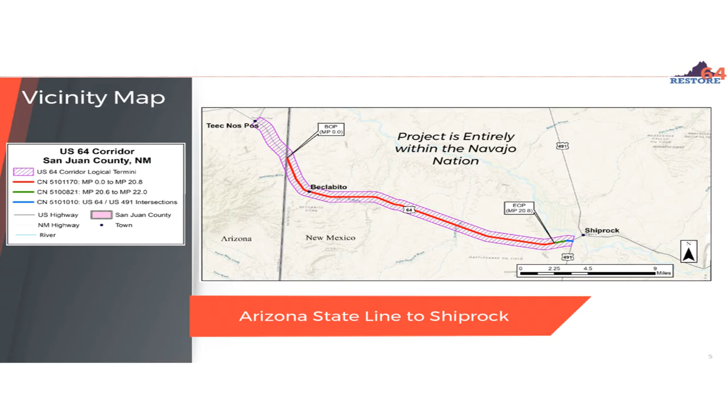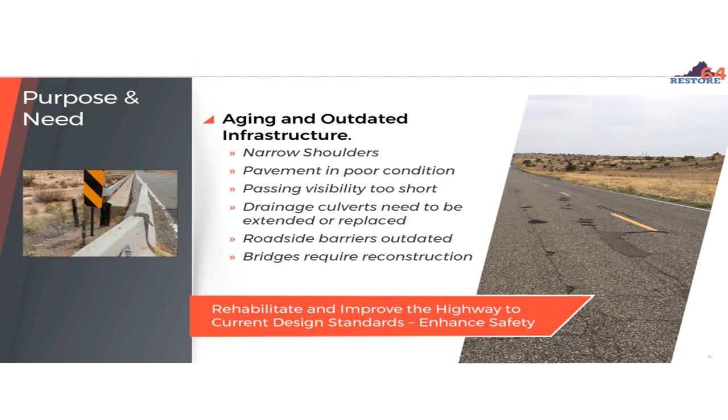We've been looking at the existing conditions and evaluating how we can rehabilitate and improve the highway to meet current design standards and enhance safety. Our review of the corridor identified aging and outdated conditions with the road and bridges, such as narrow shoulders, pavement in poor condition, low visual distance for passing vehicles, and old bridges. The project will look to add turn lanes at intersections, enhance school bus stops and pull-out areas, and manage traffic speeds throughout Beclabito in particular.

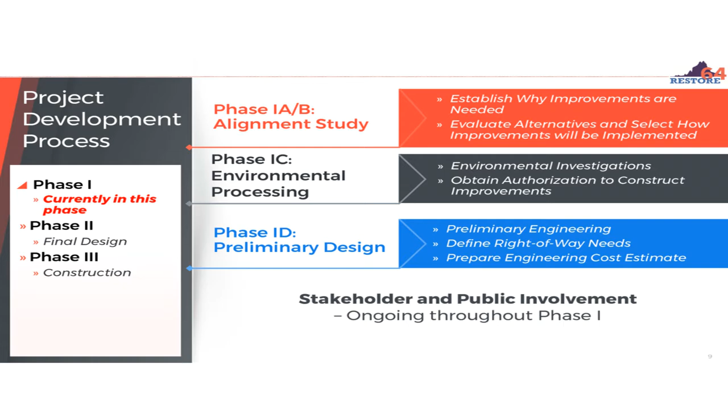During Phase 1, we are studying the existing conditions and determining why improvements are needed, then assessing which potential options to fix and improve the highway corridor may be feasible to carry through to design and eventual construction. We will continue to advance the study results after this meeting with the goal to arrive at a prioritization of possible options. During the study phase, the NMDOT considers numerous factors into their decision-making, such as environmental resources, traffic, safety, right-of-way needs, construction feasibility, engineering limitations, community concerns, and available funding.

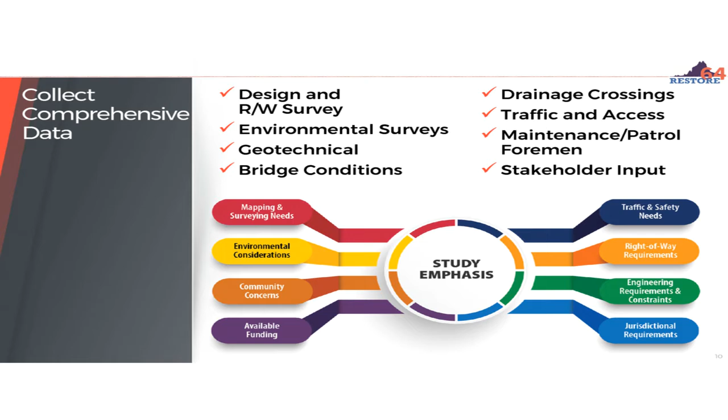Next, I'd like to introduce Jim Hyman with WSP, who will speak to you about the details of our proposed improvements being considered.

Thanks, Jennifer. Hello, everyone. Thanks for joining the call this evening. My name is Jim, and I will be describing the improvements planned for the US 64 corridor. This is an interactive call, so please use *3 or the chat room to ask any questions or provide comments.

There are 3 main types of improvements needed for US 64 involving the roadway, the bridges, and the drainage system. I will start with the roadway. The existing 2-lane highway will be reconstructed pretty much as it is today, except continuous 6-foot shoulders will be added for the entire length. Left turn and right turn lanes are provided at several intersections, and turn lanes will remain where they are already provided.

Highways are designed based on vehicle speed. Outside of Beclabito, the design speed will be 60 miles an hour. Within Beclabito, the design speed will be 45 miles an hour. I will discuss improvements in Beclabito in more detail in a few slides.

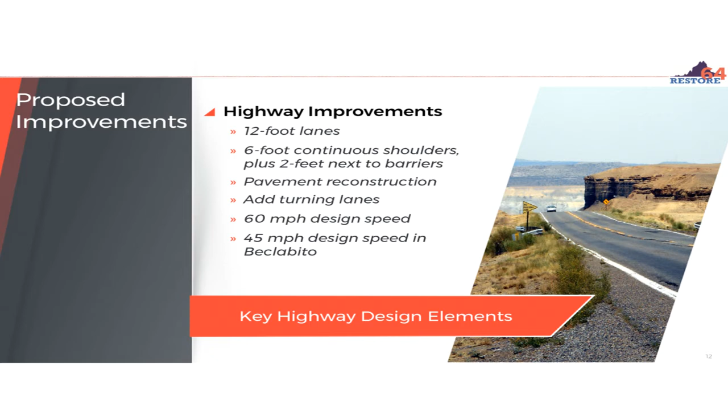When highway improvement projects are being developed, the do-nothing option is always considered and is referred to as the no-build alternative. For improved conditions, 2 build alternatives are being considered. While the improvements are generally the same for both build alternatives, the difference is in how the improvements will be implemented. Both alternatives consider existing right-of-way, which are usually marked by fence lines along the highway.

Build Alternative 1 seeks to minimize right-of-way impacts using more man-made roadside barriers and retaining walls to keep the highway side slopes within the existing fence lines. For Build Alternative 2, the goal is to preserve natural conditions using flatter side slopes which extend outside of the existing fence lines to tie the improvements into land beyond the existing right-of-way fences. As such, the fence lines would need to be moved out as additional right-of-way would be needed, but there would be fewer roadside barriers and walls.

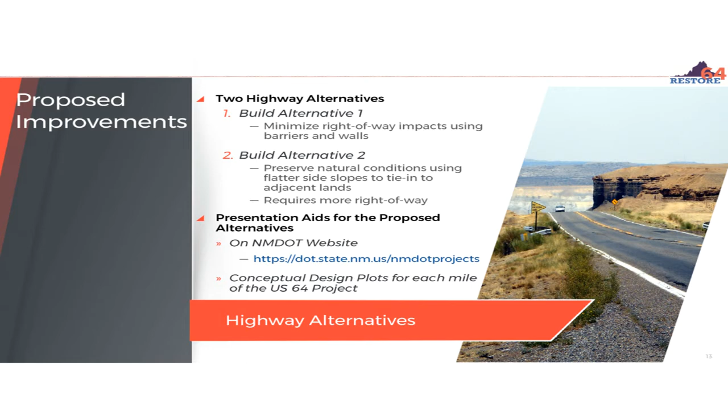There are exhibits available on the NMDOT website that show the proposed improvements for both alternatives on an aerial photo-based map. These exhibits were prepared for each mile of the corridor starting from milepost 0 at the Arizona state line, so there are 21 of them. We wish we could have gone over these with you, but that is not possible under current conditions.

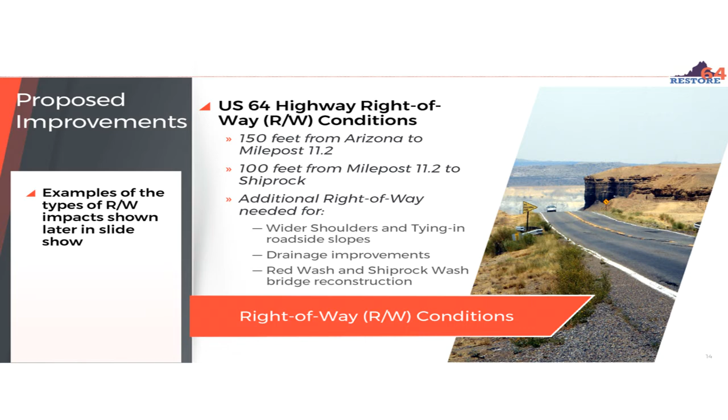The existing right-of-way is 150 feet from the Arizona state line for a little over 11 miles. The right-of-way narrows to 100 feet from there to Shiprock. Additional right-of-way will be needed for shoulder widening and tying in roadside slopes, for drainage culvert extensions and other drainage improvements, for constructing retaining walls, and to replace 2 of the 4 bridges in the project corridor.

Left turn and right turn lanes will be provided at 7 intersections, and a 3-lane section where a painted median is added is proposed in Beclabito for approximately 3/4 of a mile. Outside of Beclabito, these include BIA 5038 and BIA 5113 near milepost 6, BIA 571 near milepost 17, BIA 57 near milepost 18, and Road 9140 near milepost 19.5.

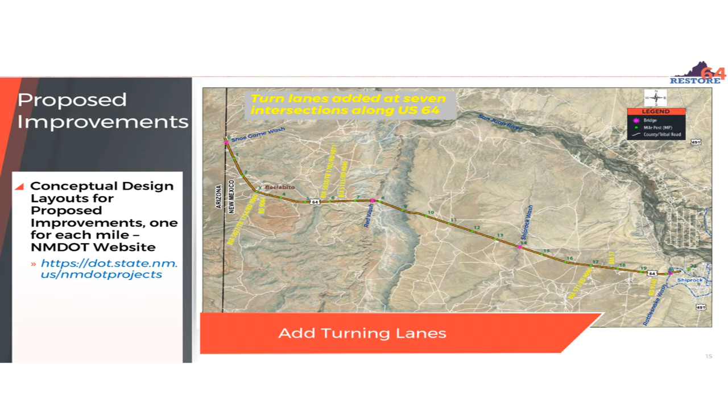In Beclabito, vehicle speeds are higher than desired. The 3-lane section is intended to let motorists know they are entering a community setting. Build Alternative 1 has a painted median flush with the pavement. Build Alternative 2 has raised islands in the median at the entry points to the community. This median provides space that could be used for installing entering community signs. Also, the existing radar speed signs will be kept and lighting could be provided at the crosswalk near the gas station.

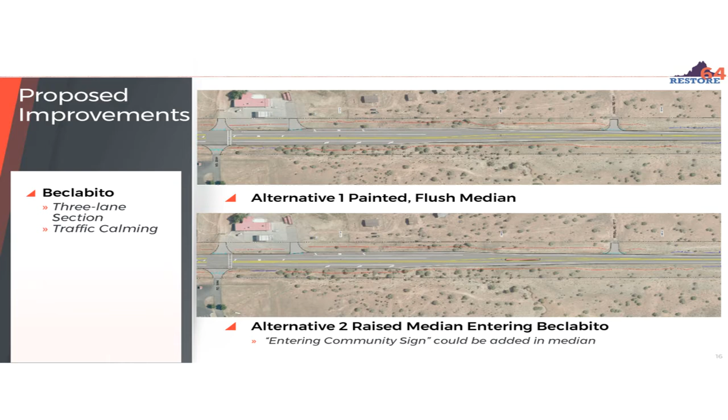On the west side of Beclabito, realignment of Road 9060 on the south with BIA 5027 on the north is proposed in Alternative 2 to reduce the intersection area and provide better driver expectation. Alternative 1 keeps these intersecting roadways as they are.

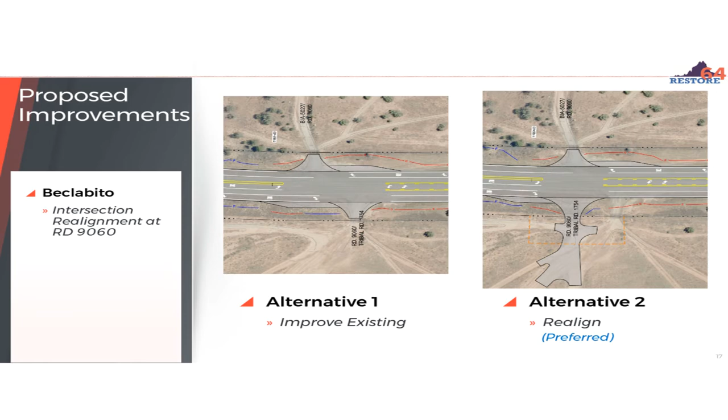This concludes the roadway improvements overview, and now I would like to describe the drainage needs. There are over 120 drainage culverts or pipes within the project limits, many of which require extension, rehabilitation, or replacement. For safety where guardrail is not provided, many of the culverts need end treatment so vehicles can drive across the end of the pipe and recover if they have left the highway.

Several of the culverts are deep under the roadway, and to improve these culverts, temporary right-of-way impacts are expected to rehabilitate or replace them. NMDOT is evaluating many of these culverts using video to determine if they can be saved or if they need replacing.

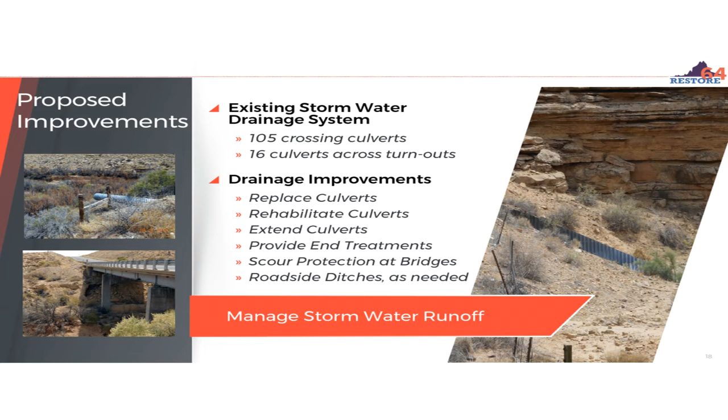Now I will describe improvements to the 4 bridges within the project, starting with Shoe Game Wash near the border at Milepost 0. This bridge consists of multiple concrete box culverts which will be fully replaced. The highway will remain in its current position over the culverts but will be widened to provide 6-foot shoulders. This is considered the lowest priority of the 4 bridges.

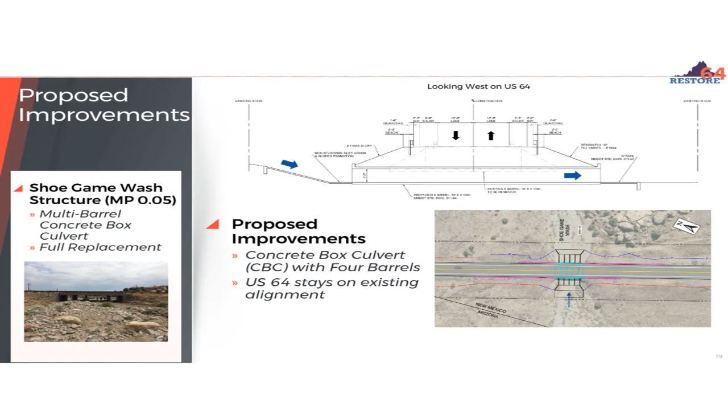Next is Red Wash Bridge at Milepost 7.6, which has the greatest need for replacement. Multiple alternatives were considered, including keeping the bridge in its existing position, replacing to the south, and replacing to the north. Because of the type of structure this bridge is, it cannot be partially removed to maintain traffic during construction, so a new bridge is needed on the side of the existing bridge. Based on the terrain at this location, it is proposed to widen to the north where the original bridge was located. Additional right-of-way would be required to construct a new bridge.

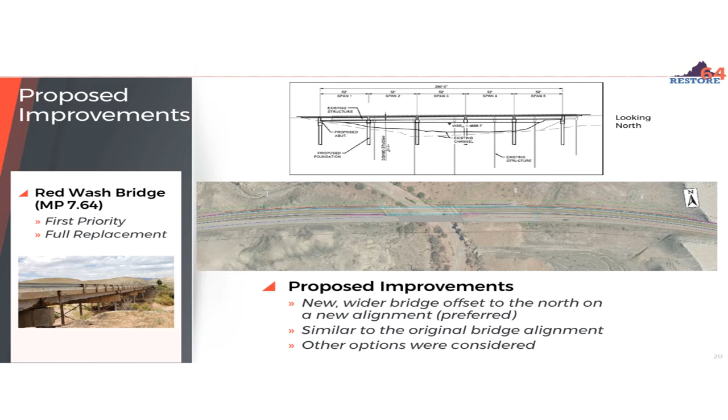The bridge over Shiprock Wash at Milepost 14 requires full replacement and can be partially removed to maintain 1 lane of traffic during construction. The new bridge will be to the north of the existing bridge, approximately half on a new alignment. An additional right-of-way will be required to construct the new bridge.

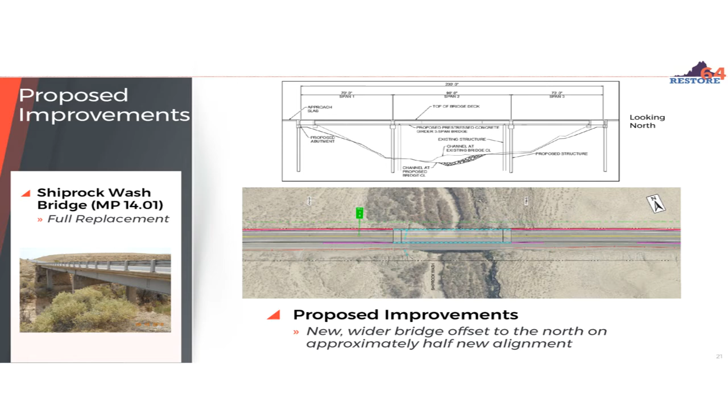The Rattlesnake Wash Bridge, just outside of Shiprock at Milepost 20.3, will also be fully reconstructed. The drainage channel under the bridge will allow traffic to be moved to the side during construction, so the bridge will be replaced in its current position. Right now, it is anticipated that the Shiprock Wash and the Rattlesnake Wash bridges would be constructed at the same time.

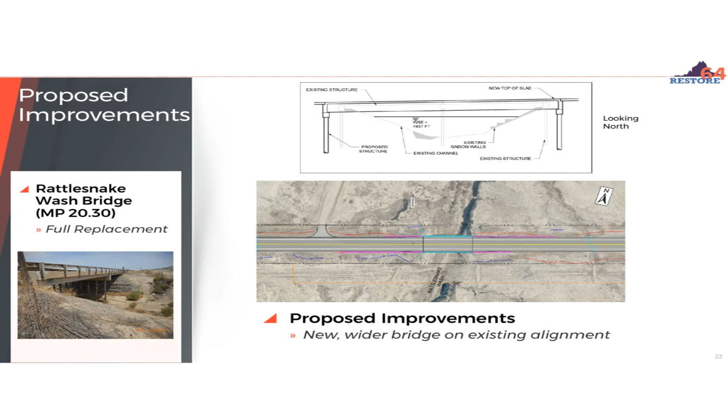To wrap up the description of proposed improvements, I would like to touch on how traffic will be maintained along US 64 during construction. There are no detour routes, so traffic flow must be maintained along US 64. Traffic will need to be reduced to 1 lane within work zones, which will be limited to 2 miles in length for flagging operations. For bridge reconstruction, instead of people waving flags, temporary traffic signals may be used.

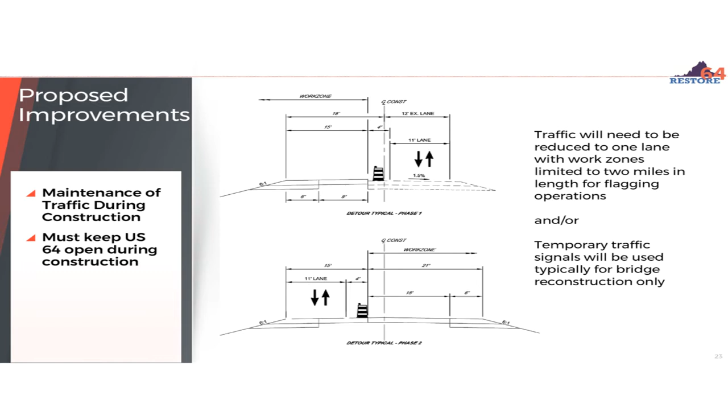Next, I will summarize how the build alternatives were evaluated, what the key considerations are. Several factors were considered to compare the build alternatives, and we still need feedback from this meeting as part of the evaluation. The key differences between Alternative 1 and Alternative 2 are: Alternative 2 is better for context sensitivity in that it uses fewer roadside barriers and retaining walls, which also results in lower initial cost to build it and lower maintenance costs in the long run.

Alternative 2 does require quite a bit more right-of-way and has a larger footprint, therefore will disturb more land during construction. Alternative 1 requires less right-of-way and has a smaller footprint, but requires more roadside barriers and retaining walls, which results in higher costs.

Alternative 1 would enhance the safety of the existing highway, but not as well as Alternative 2. So at this time, the overall assessment is that preserving the natural environment as much as we can in Build Alternative 2 is the proposed way to improve US 64. NMDOT welcomes your feedback on whether you agree with our assessment or not. The estimated cost to improve the 21 miles of highway is between $60 and $70 million.

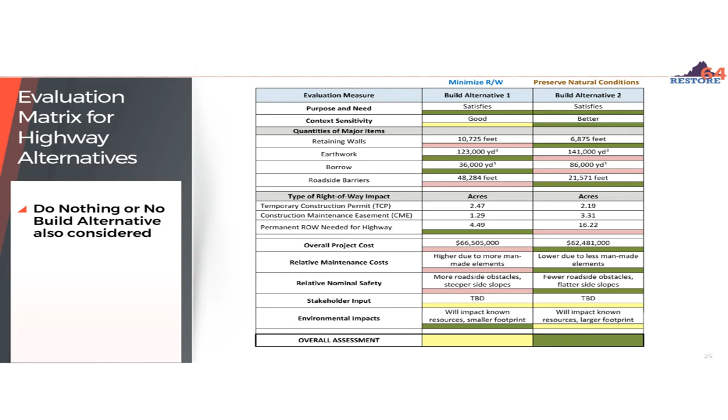The next few slides, available for view at dot.state.nm.us/NMDOT projects, illustrate typical locations where additional right-of-way will be needed, both on a temporary basis and a permanent basis. The right-of-way assessment is ongoing, and the NMDOT will work closely with the Navajo Nation to determine the best way forward. Examples of where right-of-way is needed on this slide include permanent takes for 2 of the bridge reconstructions and temporary impacts for retaining wall construction.

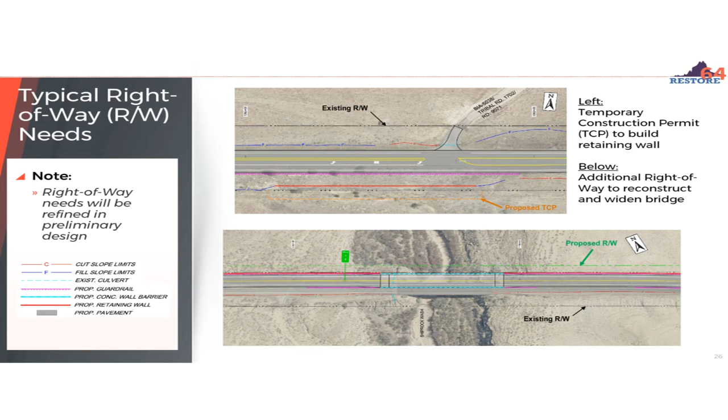Additional permanent right-of-way is also needed to tie roadside slopes into abutting land and for drainage culverts and other drainage treatments. The map exhibits on the NMDOT website show anticipated right-of-way impacts, which will continue to be refined as the engineering design advances. With that, I would like to turn it back to Jennifer. Thank you for listening and for your comments.

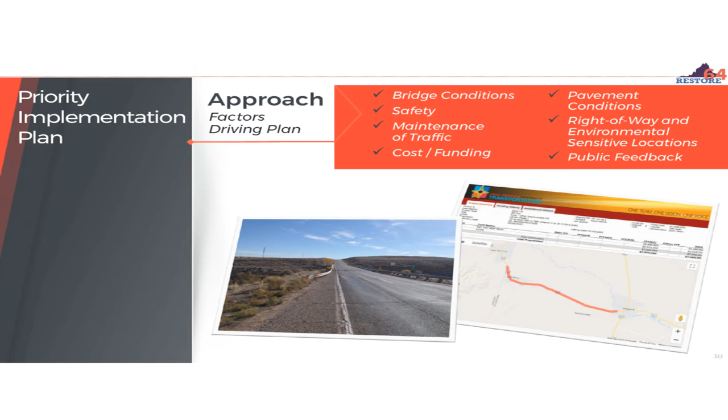Currently there are 2 projects that have been prioritized with funding programmed. The first priority project is replacement of the Red Wash Bridge, with $7 million of construction funding programmed for fiscal year 2022. The second priority project is the replacement of both the Shiprock Wash Bridge and the Rattlesnake Wash Bridge, with $6 million programmed for construction for fiscal year 2023.

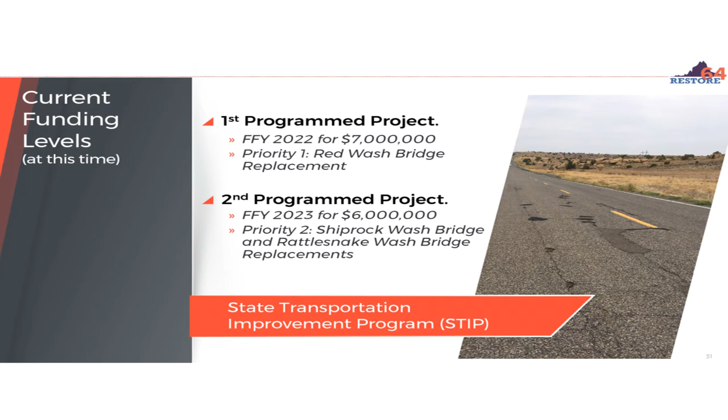For our next steps in that process, we'll continue compiling public input this evening and into the future. We will finalize the study report and the alternatives being considered, and develop preliminary design plans along the entire corridor. The DOT will initiate conversations with the Navajo Nation regarding areas that may need right-of-way and determine what is feasible. We will continue our environmental studies, complete those, prepare environmental documentation, and then develop final design plans for those highest priority projects.